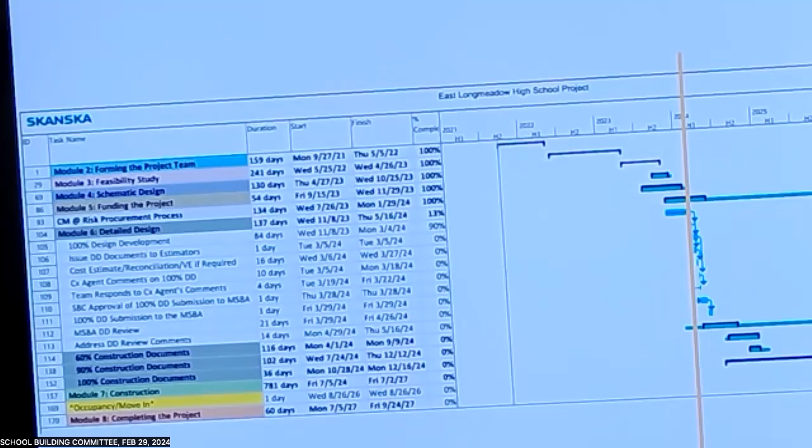And we are going to need to schedule our next building committee meeting. We're hoping that everybody is available on Thursday, the 28th. We will need approval of the submission itself to forward that over to MSBA. So we're hoping that fits in because it's going to be a tight window for us to wrap up reconciliation, make our VE recommendations, finalize it, and come with a proposal to your committee. So does that date work for everybody?

Might as well get on the 3 o'clock, March 28th. I would say 3 o'clock if that works. Sounds like it kind of needs to, right? If so, on time, make this all work the way we're hoping it will.

That work for everybody? Yes. March 28th, 3 PM. Nice.

Good, beautiful. All right, so once we have the approvals, we'll make our submission, which just starts the review period. So MSBA has 14 days to make their review and get their comments over to us. Once we receive that back, we will address those and respond.

Then you'll see the big sections underneath there: 60%, 90%, and 100% CDs. Nothing's changed from that. As I said in the last meeting, now that we have Fontaine on board, we'll work with them to build out these MSBA milestones, which are pretty limited, into the entire project schedule, which will include all the breakdown of the construction schedule. So you'll be seeing that with the DD submission and thereafter as well.

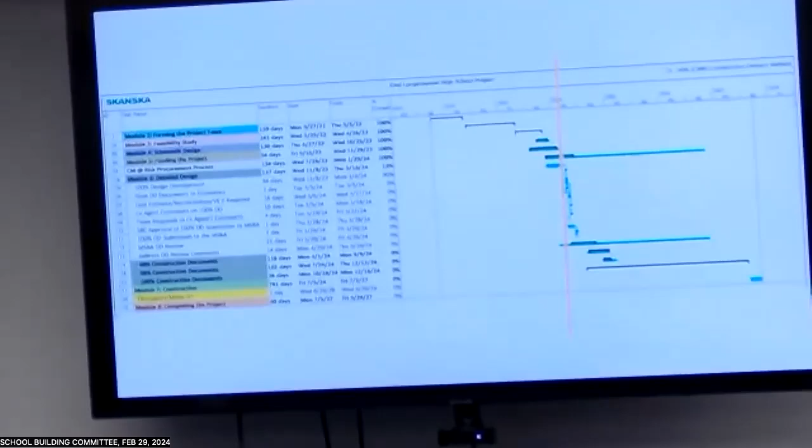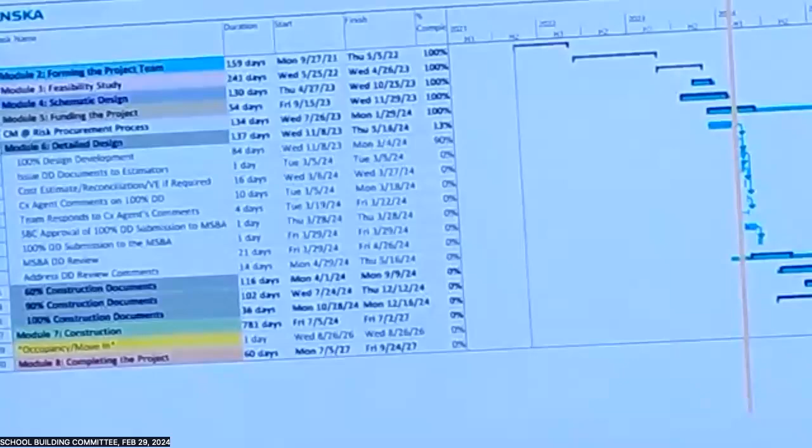So any questions from there? Otherwise, I was going to kick it over to Fontaine to introduce themselves, but for sake of efficiency, I think we can move right over. I know the design team's got a lot to go through today. Good. You good? I think so. Good with that, Mark? Okay.

All right, just to jump in, we are already working with Fontaine, sharing documents, answering questions, getting input, getting together, talking about enabling work. So that process is underway.

We've been putting into the documents the most recent survey data, working through some grading issues, and reviewing the geotech information again to help establish some of the early work that needs to be done. Both Fontaine and SMMA are doing cut and fill analysis right now, which is super important to that process.

We've been exploring with the districts some of the potential layout configurations to enable their mobilization to begin. Upcoming meetings are something I brought up here because I knew we'd talk about the schedule right away. We're in this really challenging crunch period with 2 projects that have deadlines all close together within this window of time, but we also have a couple more weeks we need to schedule now that we're at this point. I was hoping Frank was here so we could discuss - yes, he is.

Separately, we're working on setting up a permitting review with the town departments, and other contacts are already being made to establish that. We are going to immediately schedule another fire and police review of the DD set to go through security issues again. And then what we need to do now, which is exciting, is kick off the furniture design development process.

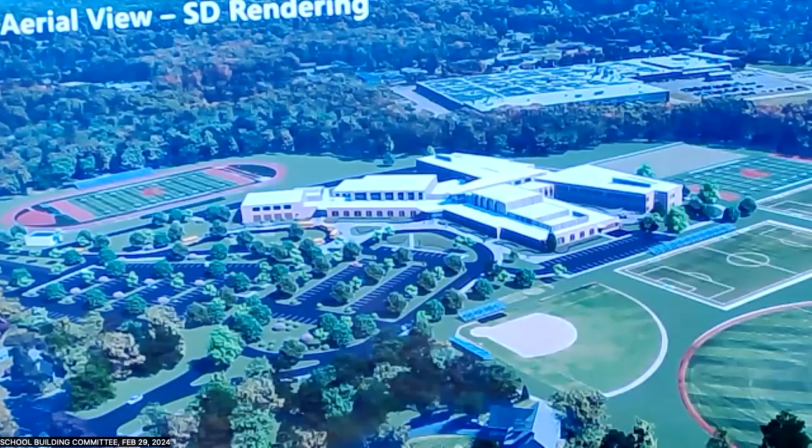So we wanted to reach back to that historical note and also carry that through in the material palette itself. We heard very positive feedback in terms of having a warm red palette that would hearken to the sandstone. Although we may not be able to have actual sandstone on the building, we haven't ruled out having a small segment element that could be incorporated.

We've gone for economical materials wherever we can. This is again from the schematic design. One of the areas we've been looking at and tweaking is around the main entry, and even the upper portion, because the two elements are related, the upper and lower kind of peaks. From here, they look very organized and two of a kind.

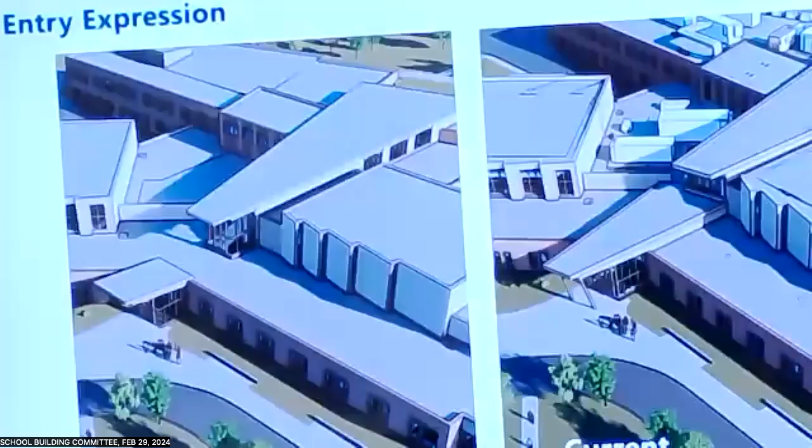If we go to the next image, we can see on the left where we had the wedge on top projecting further out in front of the plane of the auditorium on the right and the gym on the left. We had a large projection over the entry, kind of a separate piece, and you can see there are a little bit different geometries.

So what we've done recently, working with JWA, is looking from the eye level of the interior as well. What we were starting to see was on the left, that interior space being very vertical, and maybe not the best proportion for an entry to a building like this, where we want it accessible by the widest range of the public and students with different sensibilities.

So that's been tuned - we pushed that upper element back and raised the lower element a little bit, so you still have a generous entry. And we've aligned the edges of the wedge, upper and lower.

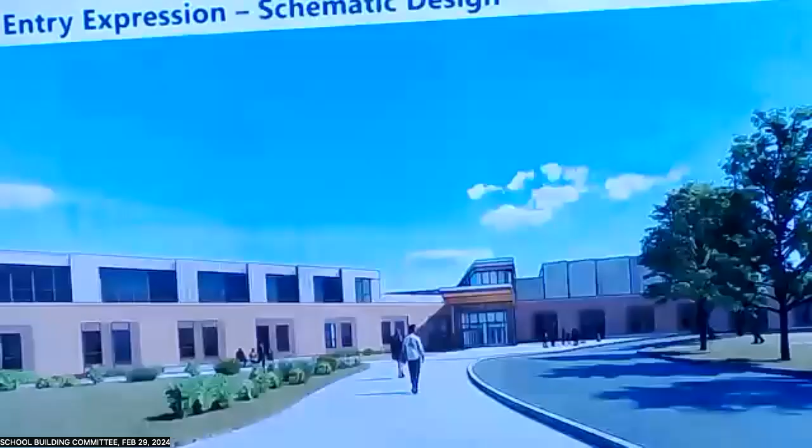In the next slide, we can see we were concerned when you come straight on to the building, on axis with the wedge, that the lower was not really talking to the upper, so we worked on that a little bit. The next image shows the current approach, which is getting the geometries to align, and now they look like they're stacked - like a double expression of one element.

We would like to keep that much extension so that we have a serviceable overhang of the roof at the main entry. You're going to have groups waiting there, queuing. It just seems like a generous offering of the building to whoever's coming in.

How deep is that overhang? Yeah, great question. I don't know off the top of my head - I should know that. Are the columns structural as well?

Yes, so they need to have something there. From an operation standpoint, that's going to be a pain in the ass - it's pulled out further than we could do with a cantilever. So we can go back and work with structural if the desire is to have no columns. I just don't think we're going to get something of that scale - it's probably going to pull back at least by a third from what you're looking at.

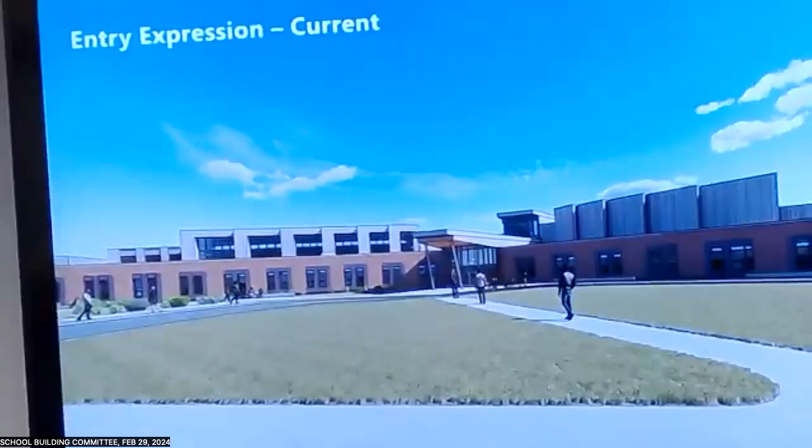I think the scale is important, I like the scale. But that was my concern with the columns - if you use a material that doesn't need columns, it's just more money. I see the kids carving in it. Well, they just get beat up - they just get pounded on.

I would guess that's 18 to 20 feet, which might be a little more than the width of this room. You don't want less than that. I wouldn't go less than that - stay outside of that.

Can we make them brownstone color? Because I see the harkening of the cliffs, right? But they're gray. Sure, if we want to make that a thing. Okay, cool, easy - the coloration is probably the easiest part of it. Because I think that will tie it all in and give a theme to the building. Great, we'll look at that.

Moving around to the south terrace - again we've carried this lighter tone red brick through here, back to where we were toward the later end of last year with a lighter field color of brick, and then creating these bands of darker brick where the windows are set into that. We integrated the solar shading devices to the top of that expression so we get high performing windows. It's good that we have a largely east-west oriented building - we have predictable sun fall on the south elevation, and that helps us both mechanically and with natural daylighting of classrooms.

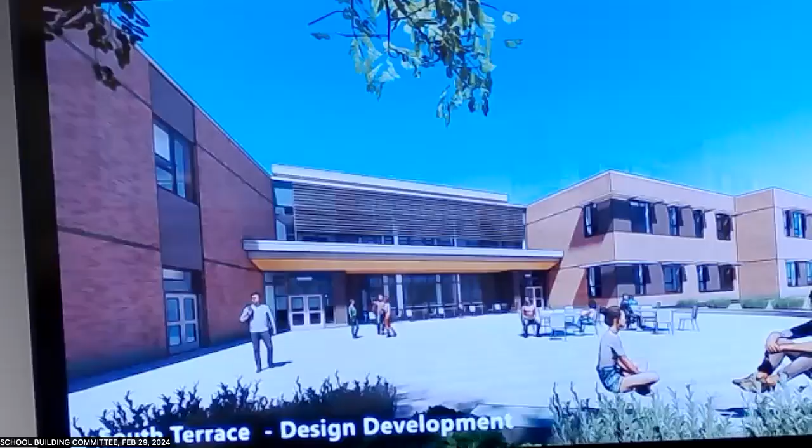We've looked at this and optimized it a bit further, and tweaked the coloration as well. What we propose, and I had shown last time, is a precast concrete panel color which is dark red, which I think fairly well matches the sandstone colors.

You look back at Town Hall, which I drove by today and looked at again, it would be of that color. The library actually uses a brick to simulate that color. It's a dark red, has a heavy texture, but it's only one brick course high. So I feel like we need something a little bit more.

We're showing roughly a 2 brick tall, so about a 5 inch band of the precast that wraps at the window head around the classroom wings, creating a string course that breaks up the scale of the building and adds some detail interest. Without that, the windows sometimes look a little unfinished if there isn't a lintel or something. So that's the approach we've taken here.

We've also reduced a lot of the shading elements where they're not falling over windows - that was sort of obvious. We had nice feedback from the Fontaine folks about whether we could mount to the window frame, and we talked that through - it was a good investigation. Currently we're penetrating the brick wall and anchoring to structure in the wall, but we've reduced quantity, so you'll see a downscaling of the cost of these.

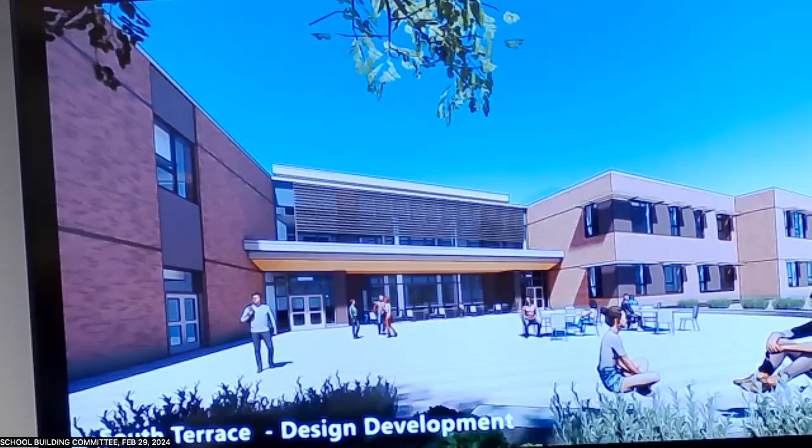It will remain bright. It's sort of like a car body paint finish that gets applied in the factory, so typically the warranty is I think 35 years or so for the finish.

Are you still tying the metal back into the structure, or have you figured out a way to attach it to the window? The windows don't typically accept a structure like that - they're engineered to hold the glass only and to sit on a structure into the wall. So attaching to the wall is, we think, the most straightforward way to do it.

If you were to convert to curtain wall systems, which tend to run higher cost, you could mount to the window frame, the curtain wall frame, because those can be fitted with internal steel that can support that load. We're finding that window frames with the triple glazed units, which we will have - and we've reduced the quantity below even what we were originally targeting - are very heavy, so the way we support them, the typical detail has changed since even a few years ago with double pane. I think manufacturers are still catching up with that factor, so adding on another piece that's going to have wind loads on it is a bit more difficult challenge.

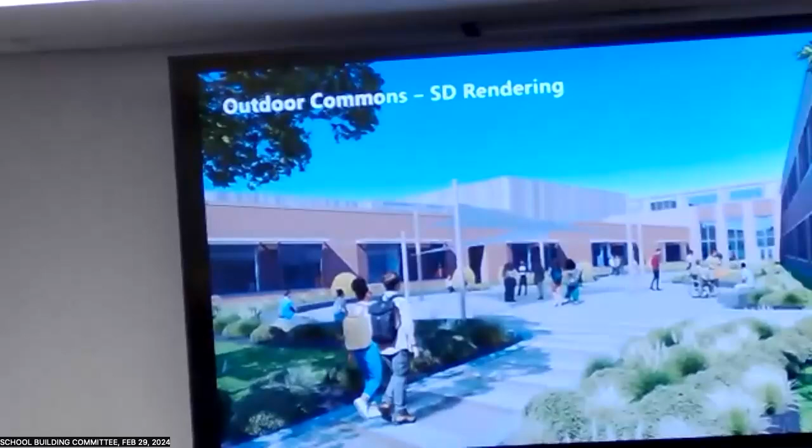All right, thank you. Next image. So here we're back to the schematic design rendering of the outdoor commons, and we haven't reproduced the quality of the image. We've taken away the sail structure, shading structure, and we are working on that the same way we're doing on the south patio.

This, I think—and we've tweaked some of the materiality here—but the upper portion, the metal formed metal cladding, that's on the upper volumes of the building, which is up high. In the front, this stuff that you see from the front is shipping container. And that's what I see when I see that stuff, with all due respect.

That's what it is over the front of the whole school. It's formed metal. I thought we left that brick. We went to brick. No, we left brick, less expensive, which is why the second floor we talked about a different color brick. So we started with porcelain, and I thought we left the metal though. No, we have metal. I thought we left the metal, not no metal. Oh, left one away from. Went away from—left isn't. It took away the metal.

No, the conversation was around—sorry that we didn't hear it that way. Yeah, we didn't, absolutely didn't. We had three, as Helen was saying. And you can look at brick. We stayed at the middle level. The brick was like 1.5 million extra, right, over the metal?

It's about—at the time we said it was about $500,000 less to go to brick. Less, it was less than. Yes, when I look at the numbers now, it's probably more like 400,000. It's not nothing. We can look at a totally different tonality of brick up there.

We also have to talk to our structural engineer about the extra weight. I get that—so because the brick system is a single withe, its weight basically supports itself. And in the 2-story building, we don't even need relieving angles to hang the brick, we can just let it run from base to roof. Up here, we're going to need to rest it on something, so there could be a slight uptick of steel tonnage to do that. So we'll look into that.

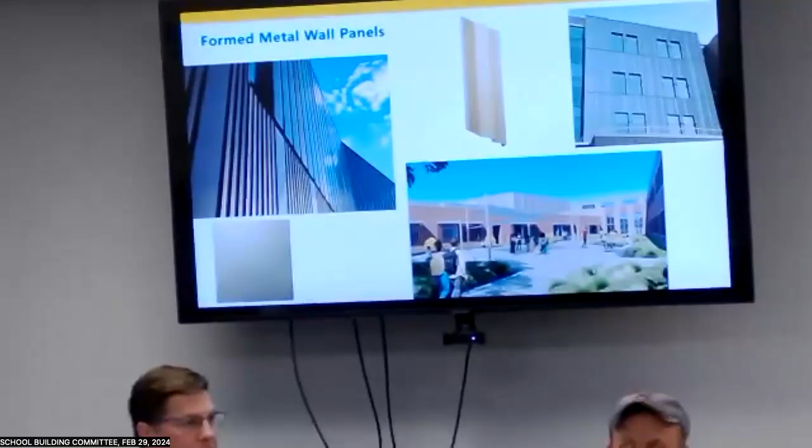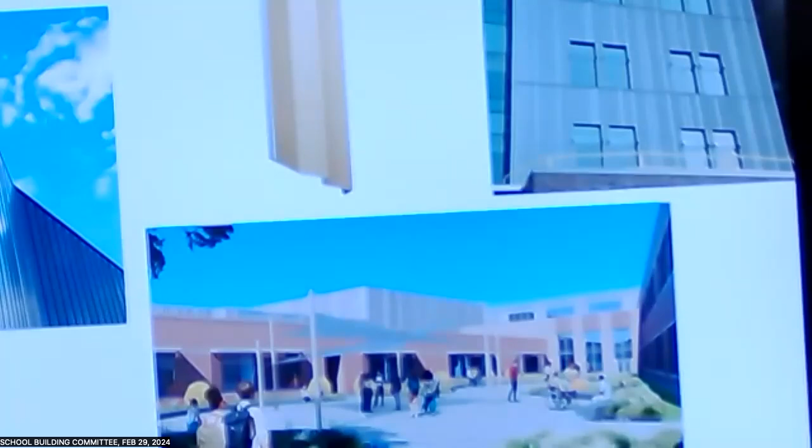I personally, and I get it, you guys have a say—I just feel it's like when you walk into a city now and they're redoing, completely gentrifying or whatever, that's what they put on all the buildings. Everything's straight and very sterile looking. And I guess I feel like, what's that going to look like in 20 years? Is that going to be avocado to the rest of the world, or brutalism? So I don't want to be the person that makes the decision, but I wasn't here during that meeting, which was my bad, but I remember when we toured the school, the one thing I didn't like about that school was how the auditorium came out and it looked like a shipping container. It just blows my mind that that's like a style, I guess, because I feel like it. Let's keep on talking.

Where it's all personal preference - the plain school we did had porcelain outside. It's a beautiful look, really preference. And again, the contrast is nice - it might look like shipping containers, but it doesn't need to look like those panels. Panels can be a different range.

It doesn't need to be ornamented. They can do smaller squares, bigger squares, design many things with the panels - not just up and down, you could do horizontal, smaller ones. These guys can design many different panels, herringbones, whatever you want.

But adding brick on top means you're talking more moment connections, larger steel, bigger relieving angles to carry that weight. So you're adding more underneath - maybe a bigger foundation, bigger piers to carry it - it all adds up.

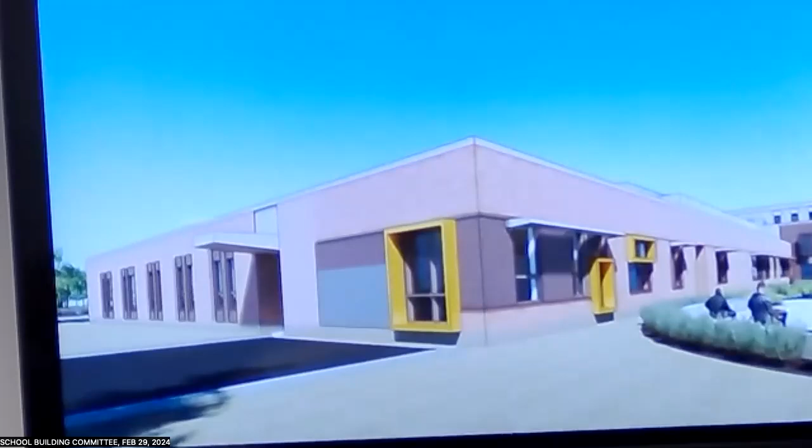I think we want to go back a few. About here. So looking at the corner of the preschool, there's an idea to look at having the windows be kind of seating opportunities from the inside, which would be a built-in element that the kids can go to, have a little space where they can maybe take a book and just sort of be next to the outdoors, right?

So how does that express on the outside? As kind of these playful boxes. We might have sort of taken this too far relative to what the program really is, but we've done similar on, say, elementary schools, and it's a nice approach. The alternative would be to simply just treat these as all the other windows in the next slide.

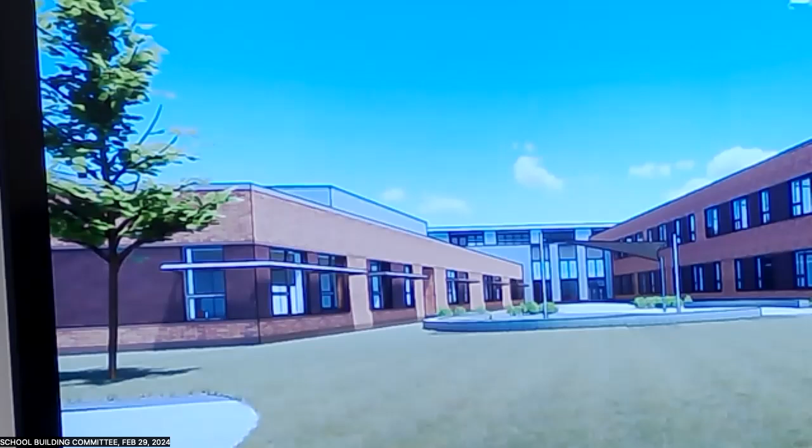This is an older image again, but looking on the left, it would be sort of the same language wrapping that corner. Where's the approach for the students and families as they come up to that? That's further to the left, on the previous slide, just to the left where. So you're like getting, because you want them to get the feel of it more than anybody else, I would think, right?

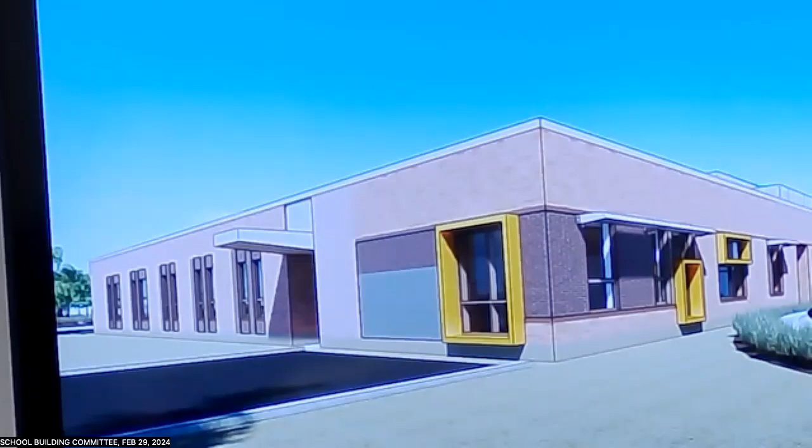Yeah, and I'll go ahead and state that I wanted us to talk about it here or get some reaction to it. My thinking being that right now we have a preschool program, and it's a relatively small program. Is it at any point in time you opted not to have that program? Would it bother you to have this?

That's all the question, because I think I like the change. Playfulness of it, yeah, playfulness. An area that's got some outdoor features that are nice. We're gonna have a little playscape there too, right? Exactly, yeah, there's a fenced yard right around.

I feel like I like that. Yeah, I'm not real fond of the yellow necessarily. I don't think Heather is either, but I don't mind a different color. It's a playful color. I believe it's metal. Brian, that's metal panel. It is.

Okay, so that was, sounds like we're liking this. So it's okay if things, so we can pay for the brick. Right, moving on.

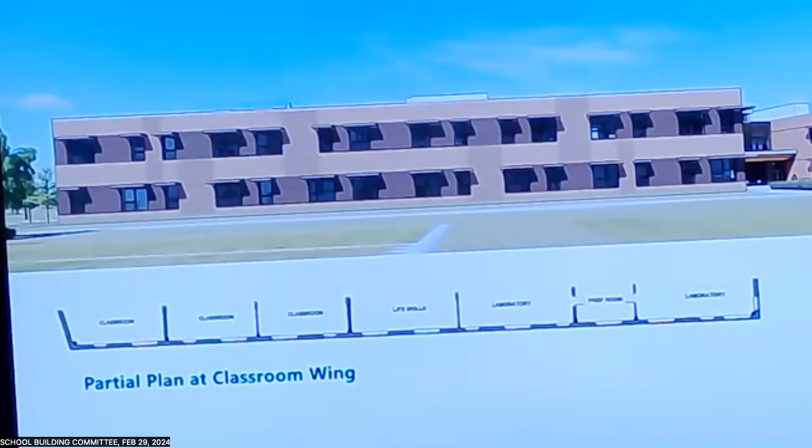Did you want that? Yes, this. So I think again, heard last time, and we always know when maybe the door isn't 100% closed on a thing, but where I had heard a lot of positivity about the horizontal sort of banding expression, I know that some liked a vertical approach, and so could we have it both ways by integrating a textured pattern, which is that sort of lighter touch of textured brick in these panels that kind of go up and down on the facade. It looks a little bit more playful.

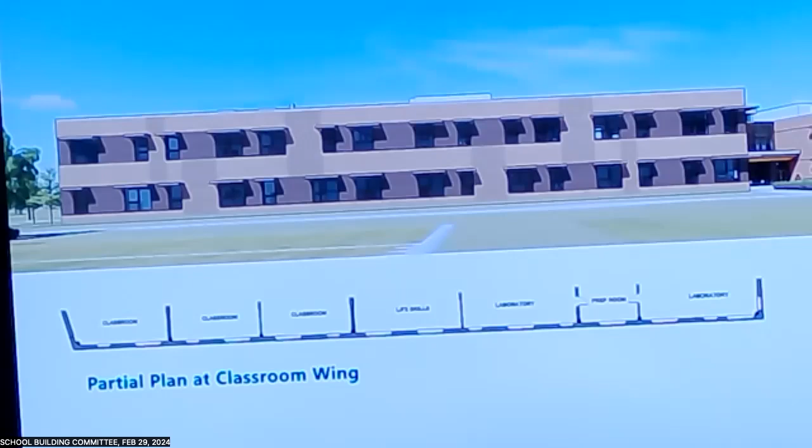It breaks down the reading of that you might associate with an office building with the sort of strip windows. So we would like to also price this as something like 15% of all the brick facades, maybe even lower, like 10%, of being basically a weave of the brick where the short end is extended out by about an inch, so it gives you a shadow effect. On the left, you can see, and it could even be a little bit more dense than that, but it just gives this sort of tactility to the wall, and it gives it an interesting read. It'll be a rock wall.

Hopefully no one's climbing that. If they do.

Is this only on the south side? We would wrap it into the outdoor commons also, only, not on the front. I think the front is a bit more formal. And I'm worried about northern exposure and mold, like a shelf for mold or moss to grow. Right, and where you wouldn't really appreciate the shadow effect. Yeah, true. I think if we did it on the south, we'd want to at least wrap it on the ends, maybe not the north side, but then pick it up again on the back of the art wing. We're going to get to it.

Yes, no reaction? Well, I know it's a rendering. Do you have examples of what it would actually look like in real life?

So this is just summarizing the palette, which is over here. I don't know if we want to look at that before we go to interiors or just look at it all at the end. This is kind of the summary. I'm just accelerating through here so we don't have to go back.

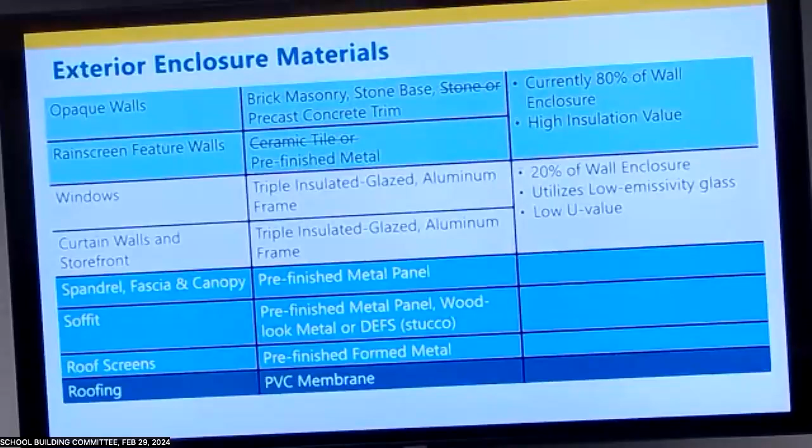Mount Holyoke College, the newer dorm right on Morgan Street, has that kind of look. We have it up at Gardner in a nice way too. You don't, I thought I saw a slide that had that. There is, I think the next one is talking about brick.

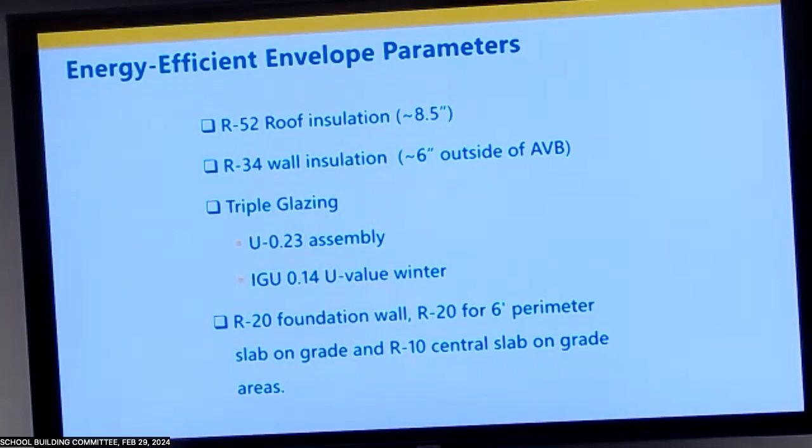Oh, nope, we're still talking about technical parameters, which we're always optimizing, and this is highly technical. We don't really have to go through that. I have taken out 1.5 inches of insulation on the roof, which is good.

So if you click again, here's in real life what that texture looks like.

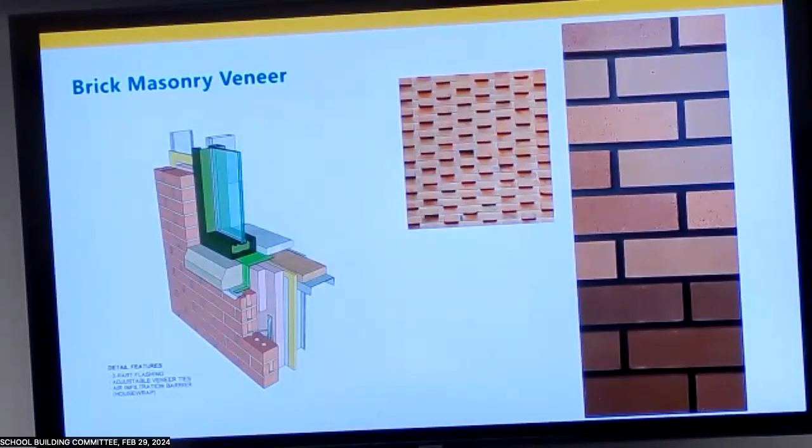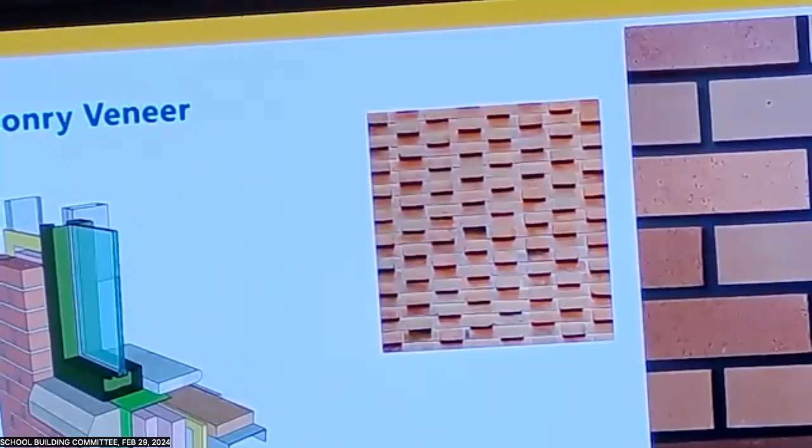Have any of you guys worked at the West Springfield High School? Anybody seen it? I'm going to send a picture, I know this is a slide and it doesn't match, but I just wanted to send it. It's inside of their cafeteria. And I just want to say, before you go to the interiors, I'll shut up.

It looks like it's that precast stuff I think that they use like on Walgreens, I kid you not. But the way that they've done it, and then they have a rounded base that goes to it, it really looks like brownstone that we would find here, a little lighter tone. And it's precast. Concrete, maybe? Yeah, it's a precast setting.

Gorgeous, it's gorgeous, and it matches the town hall, and it matches. Every day I walk by, I'm like, that is gorgeous. I have to take a picture and send it to Dory, or like, I don't know why I haven't.

But I guess that's just if we were trying to match the idea of some of the building structures that were made with brownstone, that fits it better. I mean, do you get that feel from it? It's just the design, it's the precast, it's the cafeteria there, it just matches the whole house. There's a lot of brick and, yeah. And maybe, I know that you've done this work now, but I'll send a picture.

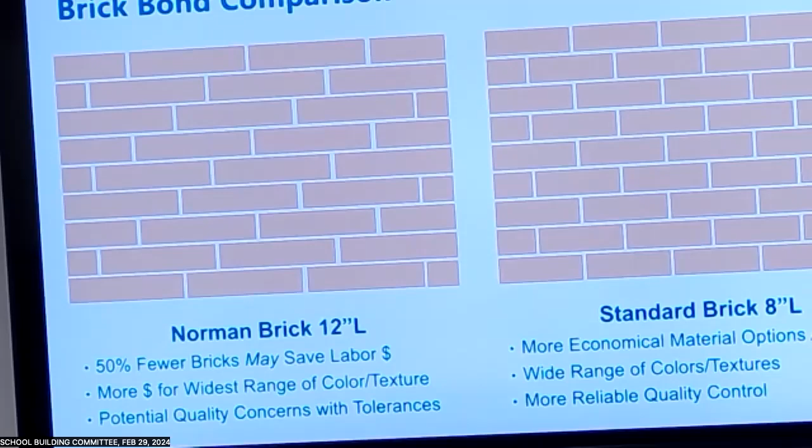This is almost purely a pricing issue. We've been carrying Norman brick, which typically provides a slight savings in labor because it's fewer, longer bricks to lay up. We've had a little concern lately about the tolerances of the longer brick and their tendency to twist in the kiln—we've had actual issues with that. So we'd like to price this, or we could move simply to standard brick, 8-inch, which is tried and true. There are a lot more options.

Is that Norman, or is that standard? That looks like it's standard. It's even hard to get samples of the Norman because it's manufactured in short runs, so there are minimums with it. With standard, you get a much wider range of color and texture, so we could just go with that. We think it's going to give you the best opportunity for real savings.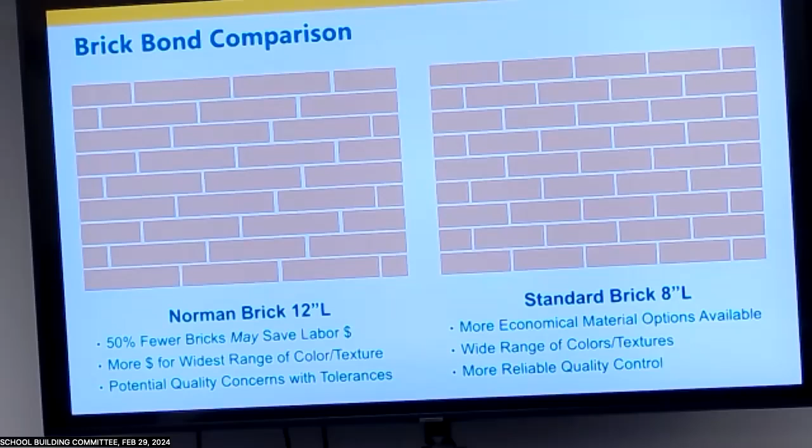What's the cost difference, roughly—ballpark? Is it going to pay for our sod? We could keep it in the DD estimate as an option if you want to know the difference. Is there a desire for the Norman? No, but if it's 50% less... fewer bricks, and it may save labor money. Right, but then it costs you twice as much.

Do you think it's twice as much for the Norman, or for the mason to put it in place? I agree—we've got some Norman on the job we're doing now, and the jumbo bricks, when baked in the kiln, curl and twist, and you get a lot of variation. You get shadow lines—even though they're flush at one point, they're curled out. We've had some jobs where it's perfect. It depends—less color choices, longer lead times, all that kind of stuff. At the end of the day, from a distance it looks good, but if the sun hits it right, you get the twists and turns, and it's like, what the hell did they do?

But in terms of cost, the standard brick guy can lay 500 to 600 brick a day depending on linear footage; with jumbo you'll get a little more. When they bid it, they're bidding brick and bidding guys laying—you're not going to see a large cost difference. It's going to be your lead time and color difference, and then your final quality. I'm going with the standard that they carry in stock. Right, consistent—standard brick.

Before we wrap that concept—given that we've also given Brian direction to explore textures in a different way, I'd leave a little allowance that if the Norman ends up being helpful to that exploration in small quantity, maybe for the sides or something, since the Norman may help with that banding you're interested in—just keep a little caveat. Thanks, Tori. Caveat accepted.

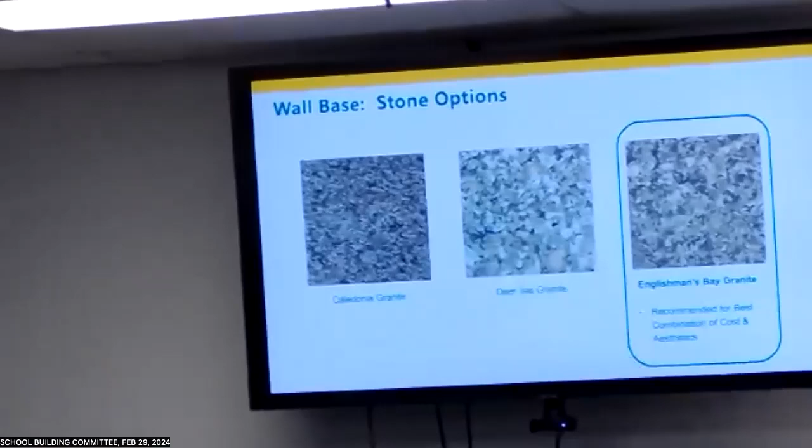We showed granite last time, and I think we liked the Deer Isle, but the Englishman's Bay is very similar and a lot more available and economical, so I'm recommending that. It's from Maine—it's a great stone, and I think it works well with the palette.

Next slide, please. All right. Yes, not a single thing—we have talked about that already, did that?

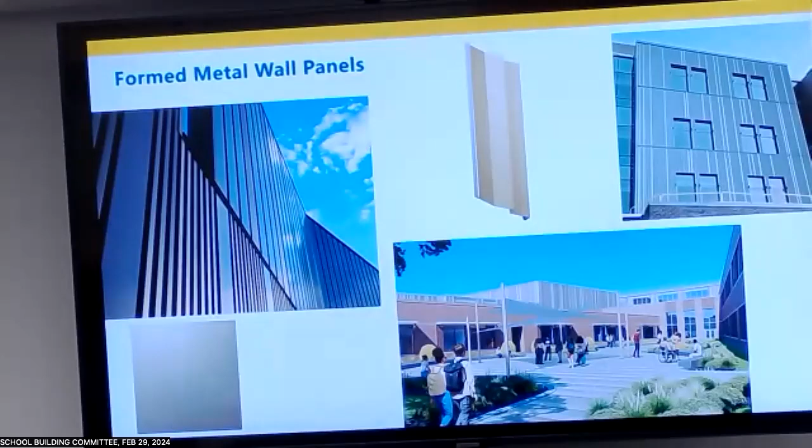This might be the last one, but we did take out over 25% of the sun shading devices that we had at SD, so we should see a good number come back for that.

What was that—because of a window reduction, or just going with less solar shade? We had them continuous, and they were shading areas that didn't need it. So a slight trade-off is you can see the angle of the sun allows just a sliver of light to get in on the edge. We've extended the length of these individually by about a foot on either end so it minimizes that. No system is perfect, but this is a pretty good one.

I noticed we don't have the PV on the roof yet. I know we're not there yet, we're going to have another consultant. However, the aesthetics from the exterior are important from the approach, right? So are we going to address that?

And we are now putting units on the roof. Sorry, this is totally going away from your interest here, but we have all this mechanical system on the roof, right? So even if we consolidate, it limits our availability of area. So that PV currently would be on areas that are to the front on that first story. They'll be on all sorts of rooftops, and it would be visible. The only way to make it invisible is to not have it there or to put expensive screens on there, which I do not think this committee wants.

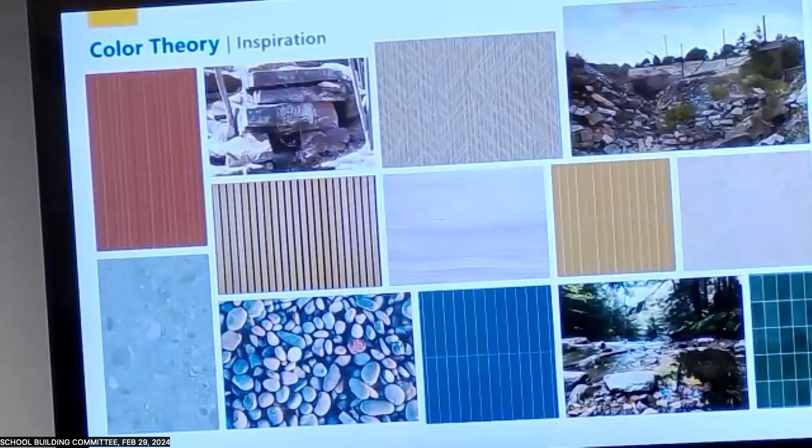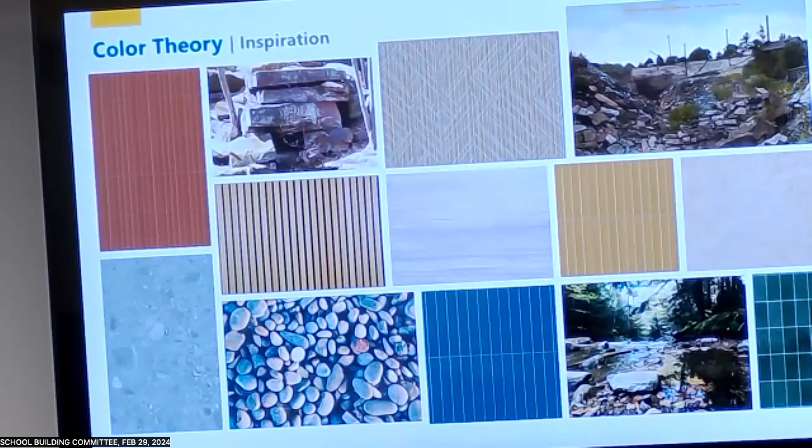Bringing you back to the natural materials, the quarries in the area, inspiring a lot of the color palettes of the material, the texture, and the shapes, all of the above of the building. So this is just a little sprinkling of all of our materials coming up, so we're not going to overdo it - like everything's not going to be red tile is what you're saying. Great, your house.

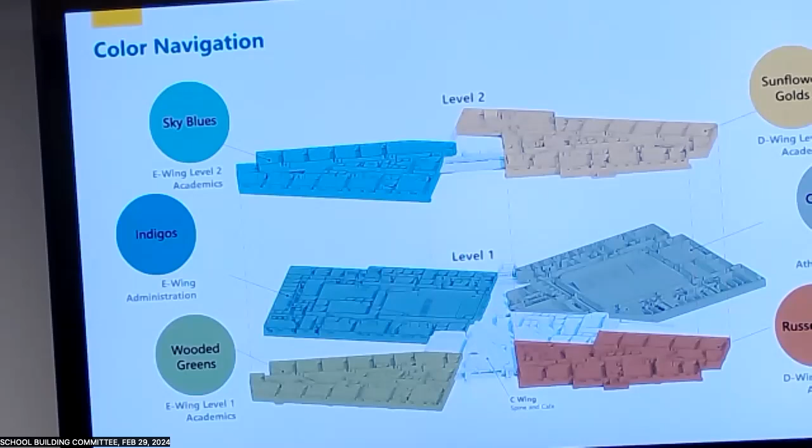There's some... get back to the Brady Bunch. No red, no red, no, yellow. You can over-accentuate the color, right? We could be red and white everywhere. I don't want that, I like the green.

So we're trying to use color as a navigational tool, a wayfinding tool, and we're trying to keep within a very natural palette because of all the stone, the quarry, and the sandstone we've been talking about on the exterior.

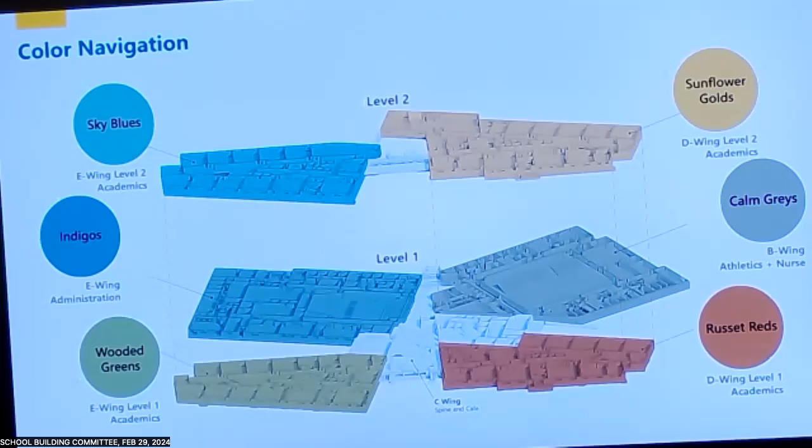So this is just a brief overview of the building. It's a little hard to understand because of the perspective, but level 1 has the 2 academic wings on the bottom. So the wing is not going to be green. There's going to be accents of color, actually a very limited amount. They're just acting like punches of color. Everything's going to be a very natural, neutral palette, but this is a way to identify what part of the school you're in.

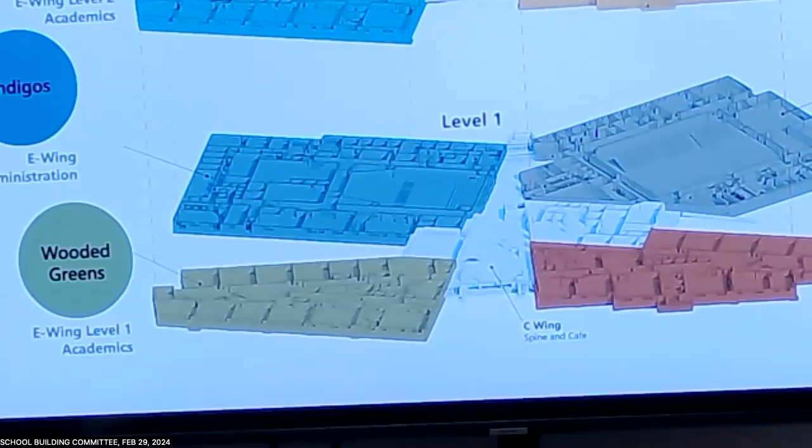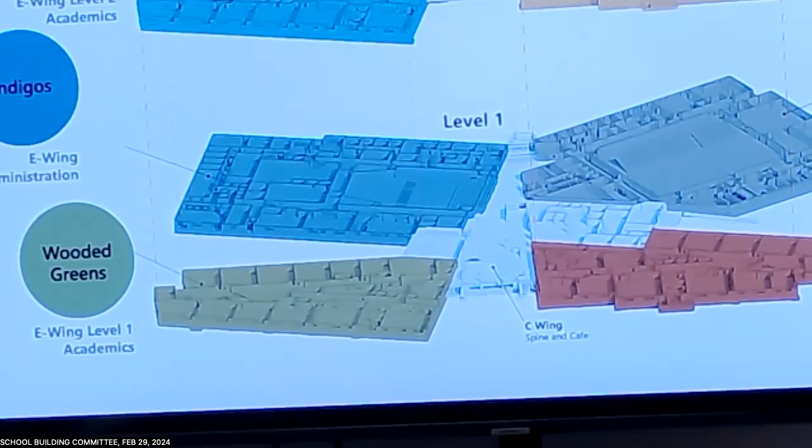So the 2 academic wings are red and green. The admin and art wing, where the auditorium also exists, is a deep blue. The colors are looking a little vibrant here, but they're really not this bright - there's much more of a muted palette.

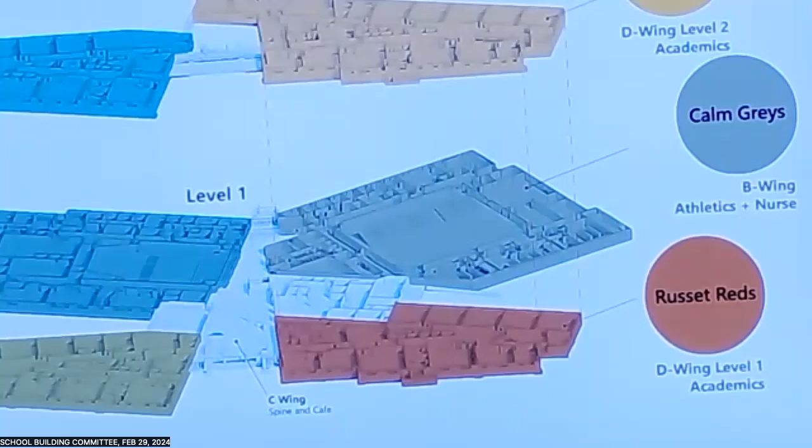The athletics and nursing, or wellness wing, has grays primarily on the back part of this vantage point. On the front is the locker room and athletics, so that would tend to go more to the school colors and be a little punchier, black and red. Then upstairs on the academic wings is sky blue and a nice bright golden color.

So that's just to kind of get familiar with the mindset of the navigation. And then you can go to the next slide.

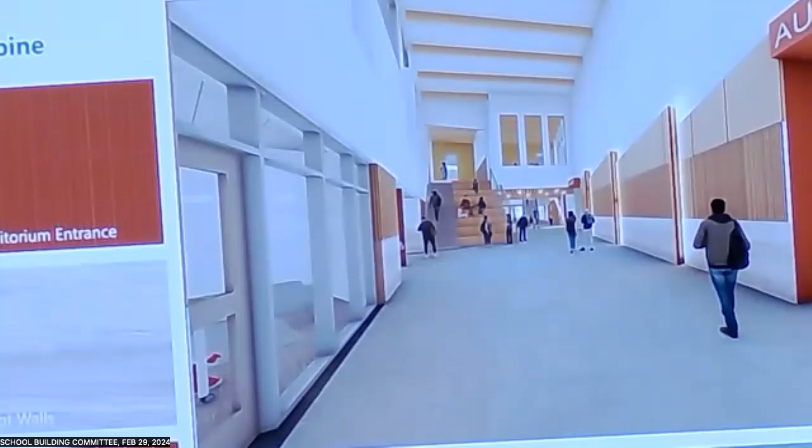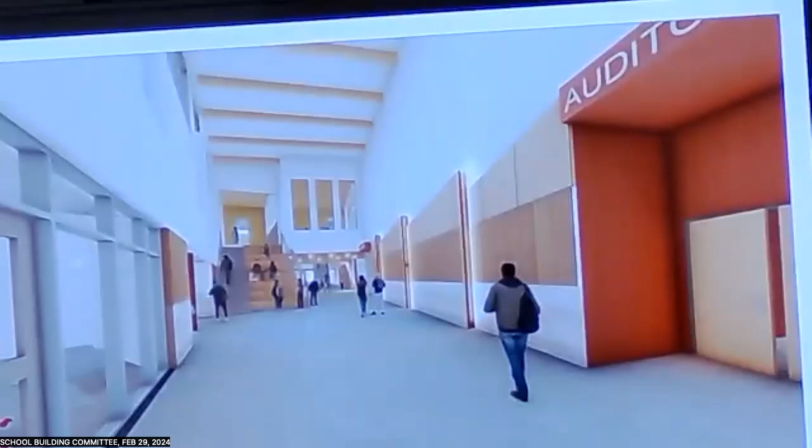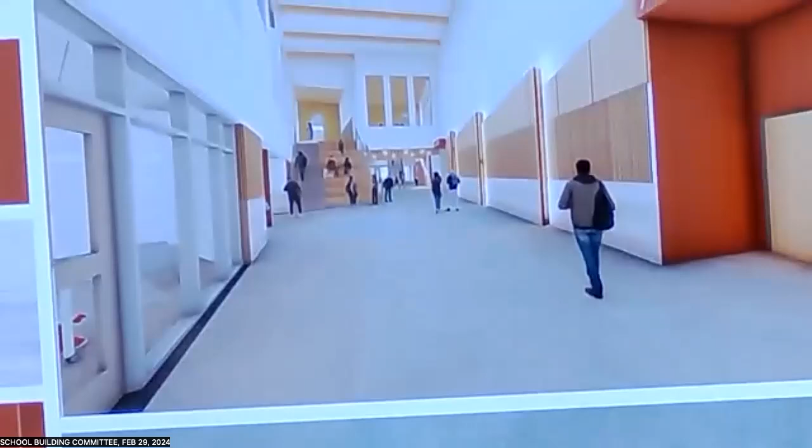This becomes a real social hub, with a lot of kids coming and going, so it'll hold up to that well. The materials on the wall are all warm and natural palette with wood, and we're using a really beautiful tile on the wall that is directly inspired by the striation of the soils and the stones in the quarries. It's got a really nice tactile feeling to it, almost feels soft. It's really nice.

The auditorium is really a big feature in this part, but it's also starting a navigational concept where all the classroom entrances have a similar treatment - a very matte, small, vertical set tile, so it makes a real nice texture in the entrances but is an easy navigational piece going through all the wings. They'll all have that accent color of this type of tile, but we wanted to really make the auditorium feel like a bigger splash here.

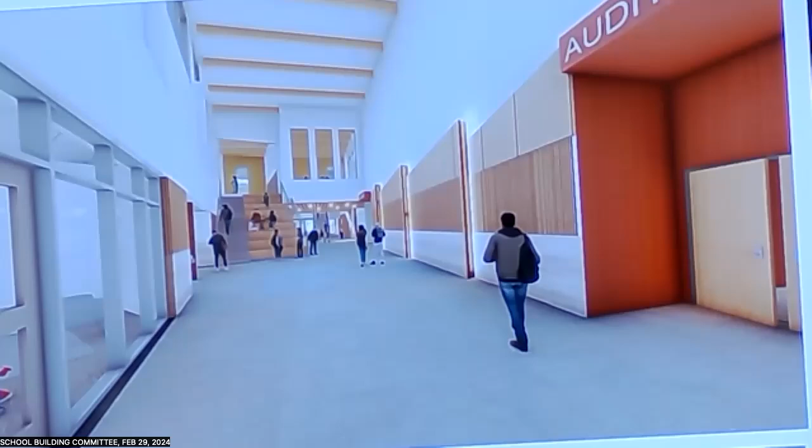What else do we have? The monumental stairs are going to have terrazzo on the left and wood on the right, so it's another social opportunity for gathering. Then the water fountains - I have this tile over here, it's a gloss tile, red, but with a lot of variation in it, so it's not just solid, less of an elementary school feeling. We're trying to really elevate the look and feel so the kids feel this is a beautiful, respected space, and therefore they feel respected too.

I am happy that you guys didn't... I'm happy with this entrance, I think it's really beautiful, I think it has a presence to it. As much as I might have liked the stone somewhere else, I think you lose the auditorium in that area with the cafeteria, and this is really pretty. Yeah, and the natural light is going to be a wonderful thing when you step into this school.

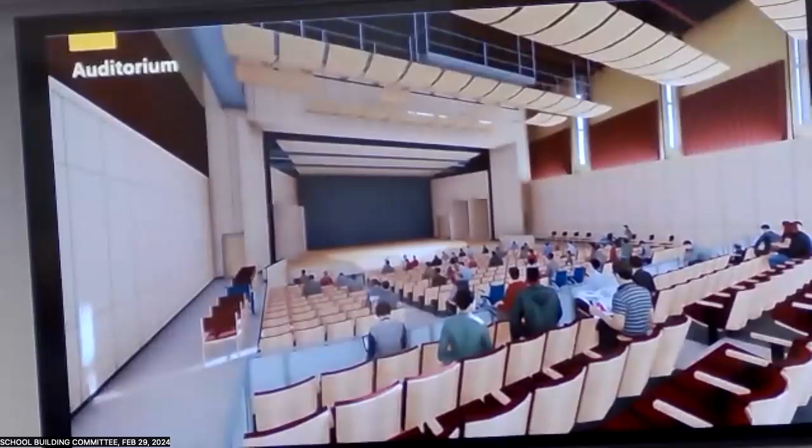Next slide. So if you enter the auditorium, we're going with a really warm wood palette and trying to keep the red but not make it feel too bright, so it really feels muted down and sophisticated. I have the carpeting over there, also with a touch of the red and a nice golden tone to pull the wood into it. There's a limited amount of color in here, just so it feels like a calm and sophisticated space.

There's black on the back of the stage wall for obvious reasons, but there's also those pivoting doors in the back. Just a couple of details on this, because we spent a lot of time on the auditorium recently. Those doors on the stage are pivoting doors that open and close, so they create a directive and allow that movement in, instead of curtains.

The intent here, by design through our conversation, is that this is as much an acoustic space for the orchestra. It's also, just for Dawn's sake, got a very large screen that comes down just past the opening, so it's good projection space intentionally.

On the right, you see those red upper walls and those curtains. The curtains aren't quite to the full height they're supposed to be, but those are acoustic curtains that help adjust and tune the sound. Then you see those little rims of light, that's those windows you're seeing from the outside, which will also be able to block or open. And at the very back, where Katie was pointing out it's black, there's also a layer that's a cyclorama you can lower and light.

So it can also be bright, it can be other things as well. There is a set of curtains that come across, but just one, rather than the layers of curtains you'd have on a typical high school narrow drama stage. This stage is intentionally trying to be more open and brighter.

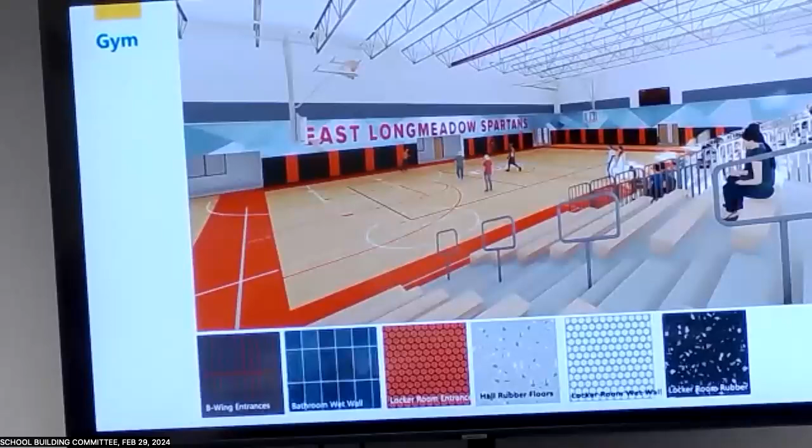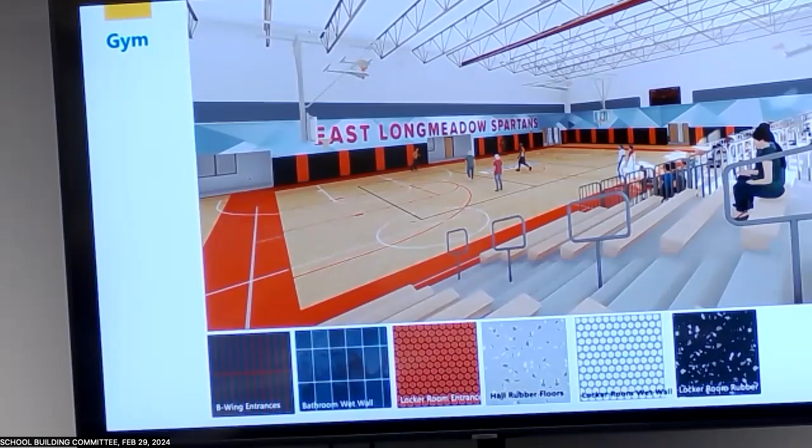So the gymnasium - I think you've seen a little bit of this, but we've added a lot of the color palette. We want to do a custom graphic on the wall opposite the bleachers, and continue it around the sides with a painted pattern. We really wanted to do the black and red school colors, but elevate it a little so it feels more in keeping with the time we're in, versus a throwback.

The openings in the gym - this is why we wanted to show it from this angle. I think it's really nice that you can feel like you're seeing out into the hallway and into the gym from both spaces. There's windows you're not seeing from this perspective, so if you're sitting in the bleachers, the room will have a nice bright feeling. The lighting isn't really showing right here, but it'll be effective both down and up, making the whole space feel really bright.

Excuse me, are those permanent bleachers, or are they pullouts? They're mechanized pull-out, and wood has been the spec thus far. Those could be plastic instead of wood, but wood feels nicer - it's your call though. Those are the ones at the school we saw, the really sweet ones. Yeah, they'd be like that.

The ones we have, you can't see one person here and one person here - can we make sure there's enough depth, enough leg room? It's important because otherwise you're only getting half the seats.

The one thing is the count, right? Yes, we have that. I'll give you the information so maybe you can compare it to the other one. Okay, perfect, I'm happy with it.

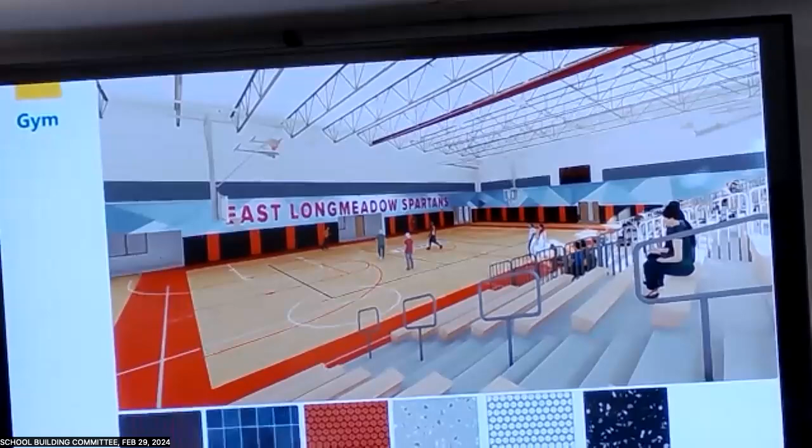It would be. I'd also seen at the school we went to, they had a motorized mechanism to store mats, putting them up here, and the batting cage. So the wrestling mat's going up too, not shown, but we're going to have that - wrestling mat, good.

Sorry, one more question - so that's an open space out to the hallway? Yeah, so you understand where you are. This is something you saw if you came - I'm not sure if you did, I did, but I was unable to make that one.

So at Middlesex, what you're looking at is towards the locker rooms, and that's a ground face block wall on the other side - that's one place where we're using block on the interior. Those are the coaches' offices that look into the gym, and that hallway is only the hallway between the locker rooms and the gym, so students aren't actually going through there. The students go from the locker room in, and that extra hallway, needed for circulation, also becomes extra storage for the gymnasium.

So you did see Middlesex, and people liked it a lot, so we intentionally brought it in. On the other sides there are windows and doorways, but this direction only has those openings. To the left, there are windows into the alt PE space and the weight room.

Thank you - minor details, scoreboards. I'm hoping there's two, but also are we going to get a chance to look at them, because our scoreboard is lacking.

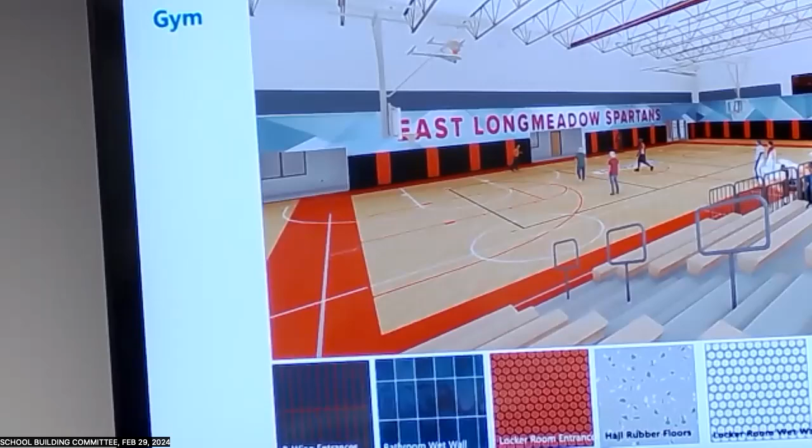It doesn't show player and fouls, any of that information. Can we do that at some point? We have the spec, because I just wrote the spec on this, and it includes player number and foul. So if that's one, I can send you that and two of them if you want. But we asked, and the school did not ask for two. They asked for one.

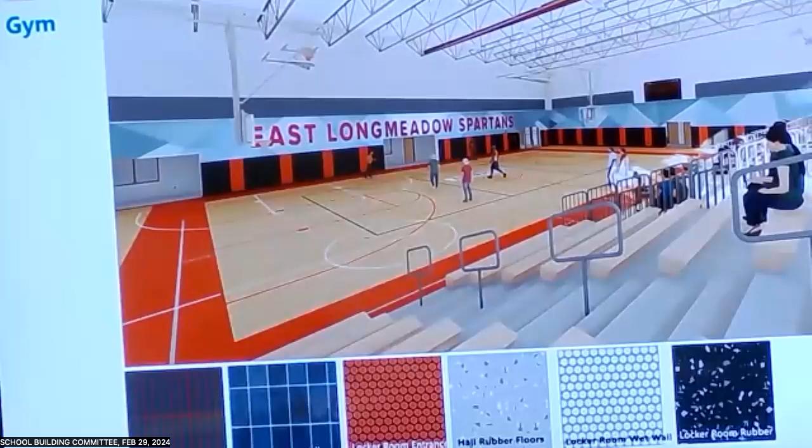That's what I mean, let's do it right. This is gonna be a beautiful gym that we want to use all the time. We want it to work, short money in this game.

I assume you want them left and right. This is small - is there enough room for the teams to sit on the side? Yeah, teams and scorers on the other side, away from the bleachers. So the game court lines are not shoved to the far side, but they're not in the center either, because you want as much room for those bleachers as you can. Bleachers are just on one side. A good, I think, 8 to 10 feet between the line and the bleachers.

Awesome. There's been a couple references to red and black. Is that - I mean, we're still scarlet and gray, correct? Well, scarlet, more scarlet. Yeah, the gray is going to be in the pattern all across the custom graphic. Black is not a main color, red and gray, that's all I was trying to say. Would you rather - we didn't go too far down the line of these are the school colors. Do you want? That's all.

I hate talking about that, I'm not - no, it's not a big deal, right. You sprinkle in gray in here? No, I'm just saying, we can shift it if it's an issue at all. It's not an issue, it actually looks sharp. I just didn't want to go too far down the black thing without - yeah, no black, right. The official colors are called scarlet and gray, correct? Okay, I just, thank you, now I can sleep tonight.

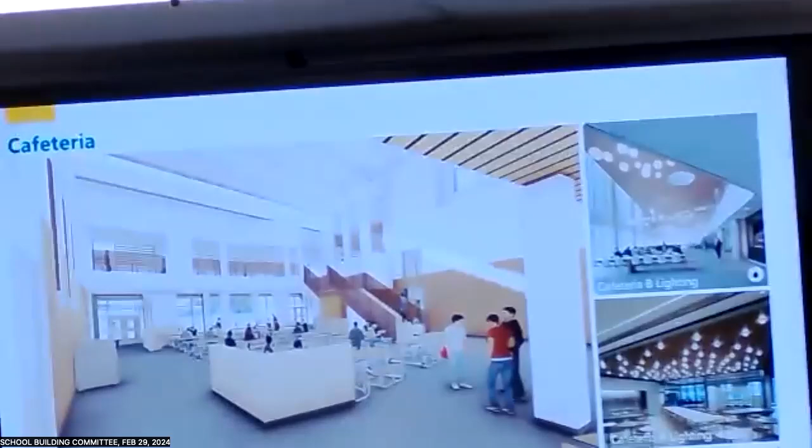So this is a continuation of the spine. You walk through the entrance and see the auditorium on your right. Then you pass under cafeteria A, as we call it, because this is the first one you come to. So that's the roof you're seeing, the ceiling you're seeing here above you. And then exiting cafeteria A, you enter into the bigger cafeteria B.

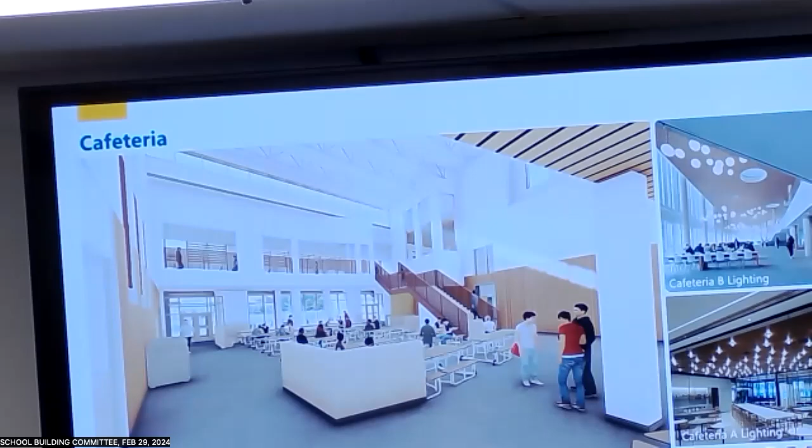That's gorgeous, my kids saw it. So we're trying to keep this - and that's how the lighting looks? It's nice, well yeah, that looks fantastic. I mean, it's a rendering, but nonetheless it's pretty cool. Yeah, I think it's going to be really nice.

So again, we're trying to keep the same general feeling of all the natural colors and the natural materials, but have little pops of the red. I think the railing is a really nice way to do so because it is bringing red in, but it's got a transparency to it so that it's not overwhelming. Scarlet - you can see scarlet.

Nice wood on the walls and wood on these partitions. And then the sunshade that Brian was talking about is up at that top area. That's where it has an effect in that hallway up there, so that allows the light to come through but won't create major hotspots. From this view, you'll be able to see the hallway colors, the individual ones - no, it's not until you actually get into the hallway where you say this is the green hallway.

So has Lori Paul, the food service director, seen these renderings? I know you worked with her. No, I don't think she's seen them. She did - I'd love for her to see them. That's where the services were going to be, but she hasn't seen these yet. Is that exposed structure at the top? Yes, in this area, yep.

So we go from the glulams in the front area, and then once you get in here, we're going to the open web because they're all... Oh, and you're not spraying that with insulation or anything like that, are you? Not here, we don't have that.

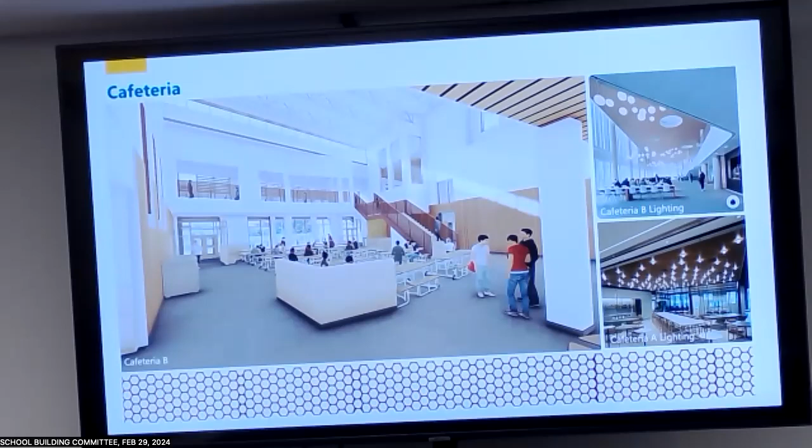Insulation collects dust, and because of your comments, I want you to know we've worked really hard to limit any of that. I mean, we have it in some accounts. I was thinking of East Hampton. They weren't even done yet and they were already dusty. I was like, but those are high.

Sorry, the images on the right are just found images to represent the type of lighting we're going to have in here. We don't have the lights in yet, but in cafeteria B, we're planning to have these clusters of globe lights just to soften some of the angles shown elsewhere and modernize the space a bit.

Could you refresh my memory? Cafeteria A and B, what's the difference in size? It's essentially walking from the spine entry, you reach cafeteria A first. So it's just A because it's the first one you get to. It's a lower ceiling - that's the wood-look ceiling right above you.

I've been referring to it as the Starbucks area because it's a little looser - less of a bigger cafeteria feeling, for kids that want to eat in a cozier area. And then this is the bigger, open area with more natural daylight, a little more socialization.

There's a little seating area under the stairs. Are these like a booth? Yeah, not a booth exactly, but a way to create some corners so they don't feel so exposed. Different kids like different things - some want to eat in a big open area and be social, others want to recede into the corners a little. So we're giving something for everybody.

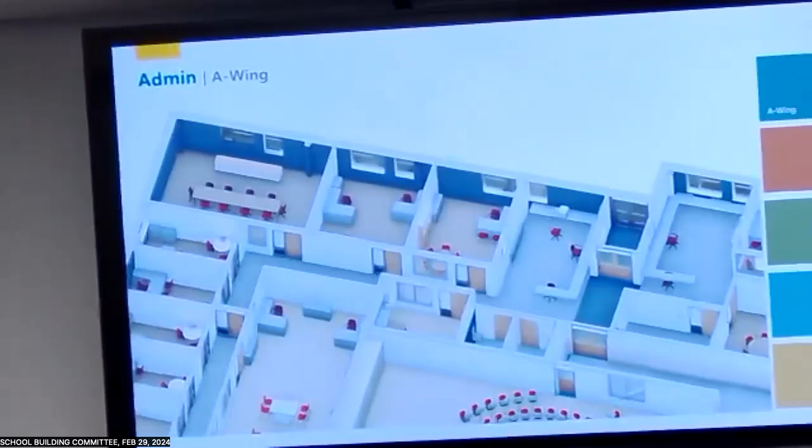So we're starting with the admin A wing - this is just to illustrate that the color in the classrooms is primarily on the exterior walls only, just an accent color. The rooms are white. These colors are showing really bright here, but we're trying to have them be stronger on the first floor, and then they get lighter as they go up to the second floor.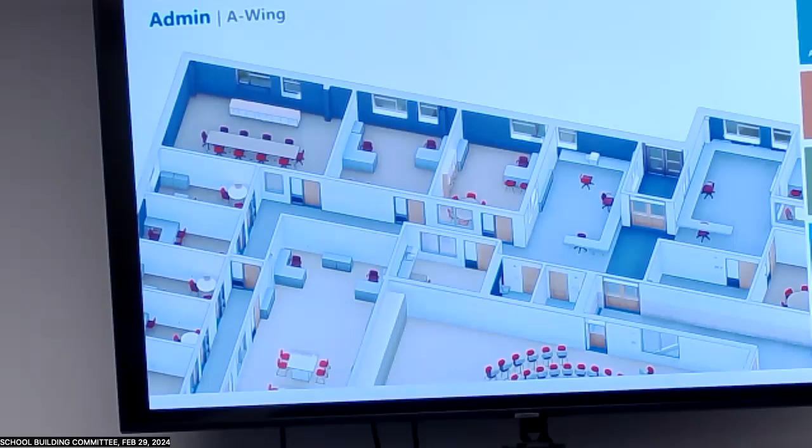It's just across from the bathrooms - that's the district office admin area. The intent is that if you have a parent coming in, you don't want them expanding into the school, so that's just that one limited area. That's the turn into the central office, so that's the central office waiting area.

Across, on the other side of the bathroom, what is that? An office - oh, you mean towards us? It's music. Okay, that's what I was trying to figure out, like the little red dots. Again, the furniture is not necessarily representing - that makes sense - those are just stools, a bunch of stools.

Nice. So we're in the D wing now. We are using, like I said, the same type of tile - this is the same tile as in the auditorium where it's textured, very matte, at the entrances.

The floor switches from the porcelain tile we had at the spine to a linoleum floor here. It's very contrasty on your screen, but the floor is actually not quite so contrasty - it shows a wedge kind of patterning throughout. It's pretty bold and big so it doesn't feel busy, spreading across in a very balanced way. And that nice porcelain tile on the walls continues down all the hallways.

Are those benches built in? Yes, and there'll be wood benches - they'll be at both academic wings on the first floor, and then we'll show you again on the second floor.

And you can see there's another gathering area under the stairs, farther back. You can see another location for those two.

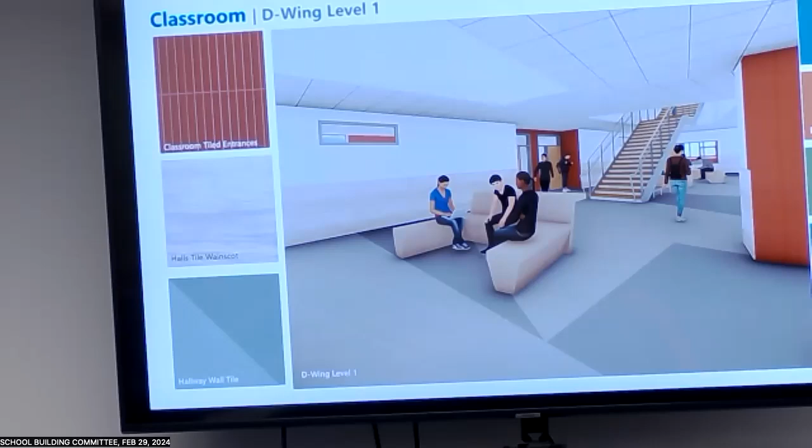Sorry, just with the wainscot, it's beautiful, but that's at 4 feet? Is it 4 or 5? Is there a product out there that might look as nice where we could take it up to 6, since they touch the wall? There's nothing. Well, it's a cost issue. I'd take it up to 6, or all the way up if we could, but if magically we have more money, we'd happily take it up because we want to.

This seating area, we'd have to look at the plan again to show you, but there's an interior mass that ends at this point, and at that end there's going to be a screen. So this seating area is across from a screen. Ryan, remember you wanted digital signage in the wings? Everywhere, so you'll see in another perspective these students looking towards that digital signage at the end of the triangle. So they get the opportunity to have that in this seating area, and in the back there isn't a screen, so there's both options for what kids are comfortable with.

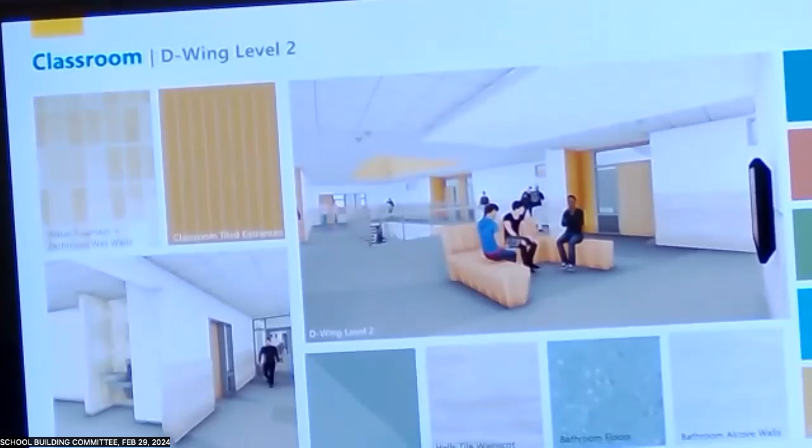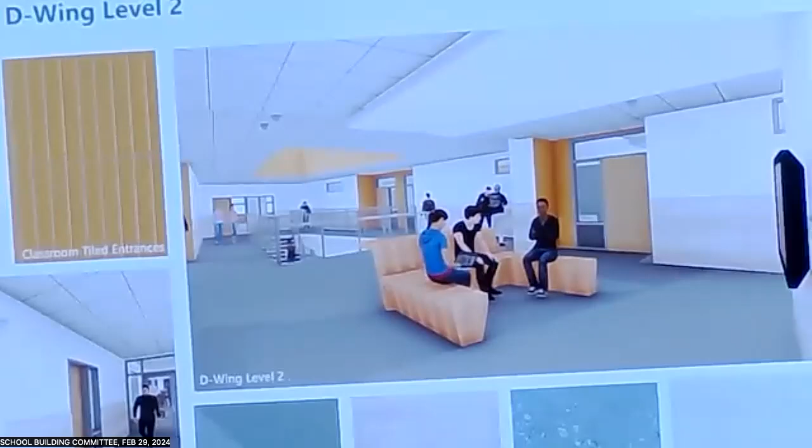So here you can see the screen, and this is the stairs leading up to the same wing. You come up the stairs and you'll see the skylight area that's painted yellow right there. There's another perspective where you'll see you have a lovely amount of daylight coming in from the windows up there. It creates daylight and an openness as you're traveling up the stairs, making it feel more expansive.

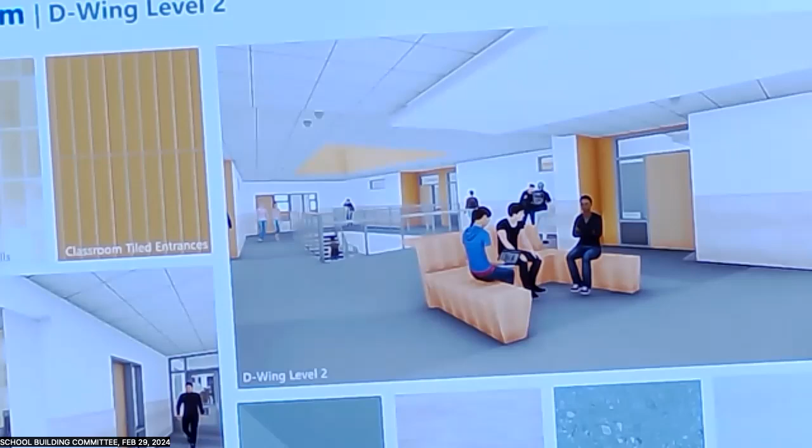The matte tile again is at the entrances of all the classrooms, and up here it's a golden color. Behind the water fountains will have that same gloss tile we have in the spine, where it's got a lot of variety but in the same accent color family. So this is like a sandy, yellowy color.

Those water fountains have bottle fillers too, correct? All of them? Okay, great.

The render isn't showing the floor well in that bathroom area, but you can see it, 1, 2, 3 over from the left to the right. That's the bathroom floor, it's a really nice aggregate, so it feels like a cut stone. It's sprinkled through both the outer corridor of the bathroom and continues in the bathrooms themselves.

Is that the same PCT product, or is that something different? It's a different one, but it's still porcelain.

We're talking about the level 2 bathrooms, and I know you just mentioned it, are we able to revisit those bathrooms? Because I'm worried about them, or is that a done deal? The reason I'm worried is because you said they were done in an elementary school, but not necessarily in a high school. That's not true. Those are in a high school? Oh yeah, and they're liking them? Yeah. Then I'll pull back, thank you.

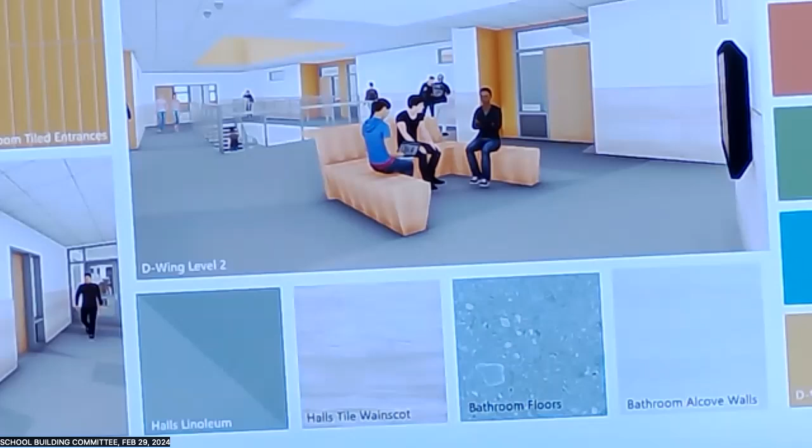My only point is there's a difference, but if they're working. The ones you were thinking of that we saw at the elementary school were actually the more airport style individual stalls, that was the elementary school. Okay, those are working in a high school, they don't have any problems with it, it's even better, it's more preferred by the number of teenagers who don't want to go to the bathroom during the day because they're embarrassed. Definitely, men are slobs, I know, but it's true. I want people to feel comfortable, I want everybody to feel comfortable, and if that's the most comfortable way, then I'll take it.

Is the little wing wall next to the water fountain just for purposes of being able to terminate the tile somewhere? Yeah.

It's nice though - like going into the bathroom, having the water there so you can take a drink. It also protects the gyp board, so it won't break down from any splashing. It makes sense for durability.

Yeah, it looks like it's sticking out a little bit. I don't think it's actually that big, sorry. I was just curious if that's what it was for - yeah, it is.

Is there any kind of built-in mat underneath there? It's porcelain. You don't want anything to absorb water and sit there - you'd rather have a hard surface than something that could be worse.

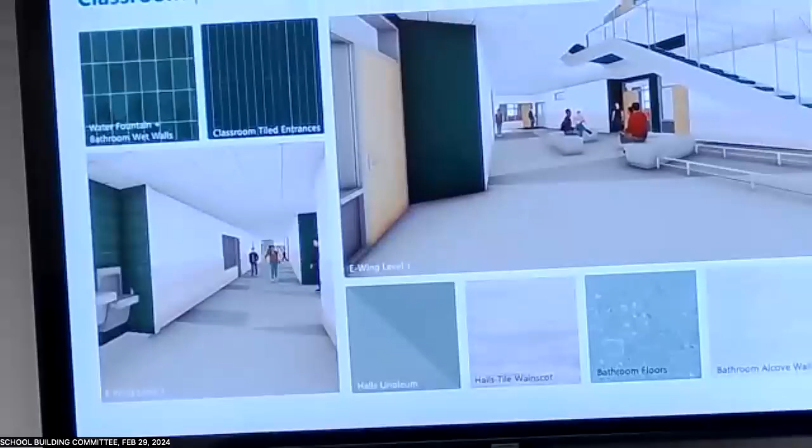Okay, and then the E-wing level 1. We have that seating area, which isn't really looking like wood in this, but it is wood, those seats. That's the one you saw in the other slide, farther back behind the stairs - showing that little gathering area.

Again, the entrance tile is the matte green, and the water fountain in this case is in the hallway. That tile is the matte surround, and it will also be the wet wall in the bathrooms. The rest of the walls in those bathrooms will be a standard matte white subway tile, so the accent is just that.

So the bathrooms will be completely tiled then? Yes. Oh, great - not to the ceiling though, they go just to 7 feet. Okay, yeah, perfect, great.

Is there anything else - those little railings under the stairs? They keep you from whacking your head, so instead you trip. Knock your head down though. Exactly what I was thinking. And they might be a little taller than skateboard ramps - I was thinking skateboard. Right, yeah, we're gonna go over that.

It's kind of a code thing we have to have - cane detection. You don't want to hit their head, you have to have it. So they can be a little higher though, right?

They can be - okay, that might help. You hit your shin. It might be nice to make them the height of the bench so they're kind of fine with that. I'm surprised they allow them that low - like what if you're not paying attention and you trip? Well, it's designed for a cane. Yeah, no, I mean I know, but I'm talking about the height-wise - like if you had the bar, but then you had another one higher.

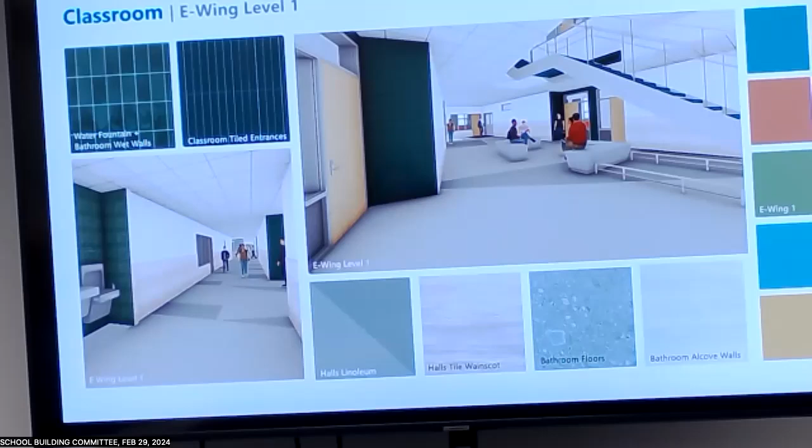Well, you don't really want to turn it into a little cage area, like a pen. I feel like they hang in the stair though. I think that's cool - and they can't do stuff during timeouts, you don't want them doing that.

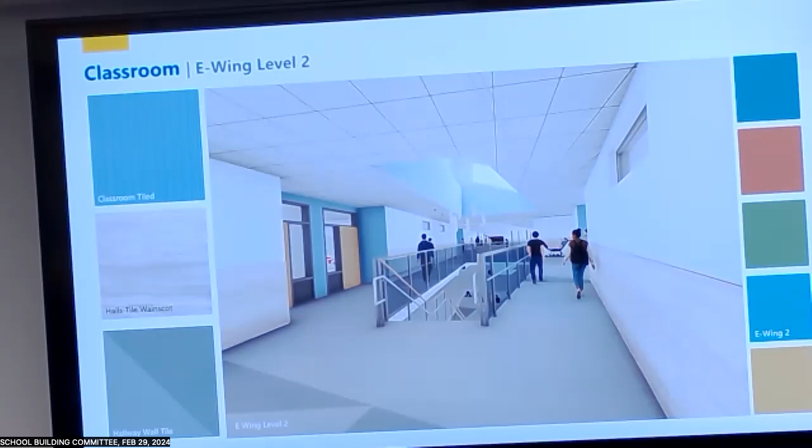Somebody said, all right, very busy, very busy stairwells here. Yes, they have it. Second floor of the E-wing, and this is the light blue tile - this is all the same theme. You can see a little bit of the windows I was talking about up high, got the skylight - well, it's not really a skylight, it's an opening with the clerestory windows up there. And then we have some nice pendant lighting moment there.

And I don't think you can really - sorry, we're ready to go. Thank you, thank you - politely though. Also, thank you.

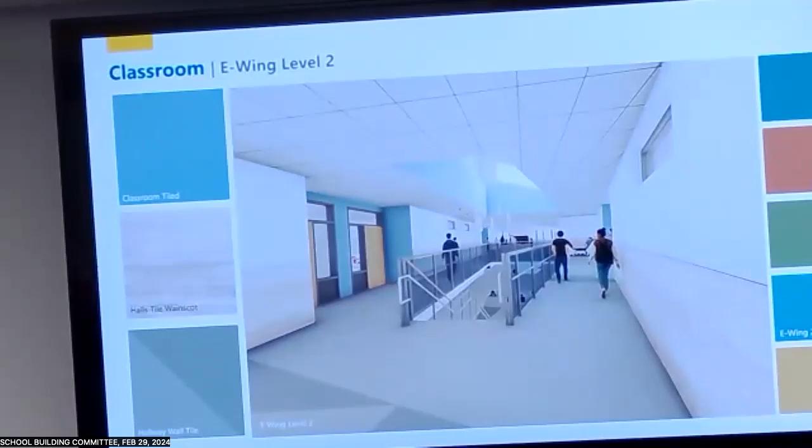And most of those materials that we are showing here are on the table, and a nice thing to do is just go over and feel them all, because the tactile aspect of them is a reason why we picked them as well. Porcelain's not slippery.

On the floor is linoleum. Oh, and that's over there also - look at the other bathroom floor area, and they're not slippery because you'll see it. Take a look - yeah, and the same with the spine, it's more of a - it's got some texture, yeah.

I love the color scheme. Yeah, very nice. Very nice, yeah, thank you. Everything looks great, exciting - it's really exciting. Yeah, yeah, we're...

Oh well, nobody sings the fight song anymore anyway, I doubt. Yeah, well, bring back the song. Sounds like a ton of job. Okay, bring it back, we're bringing the fight song back.